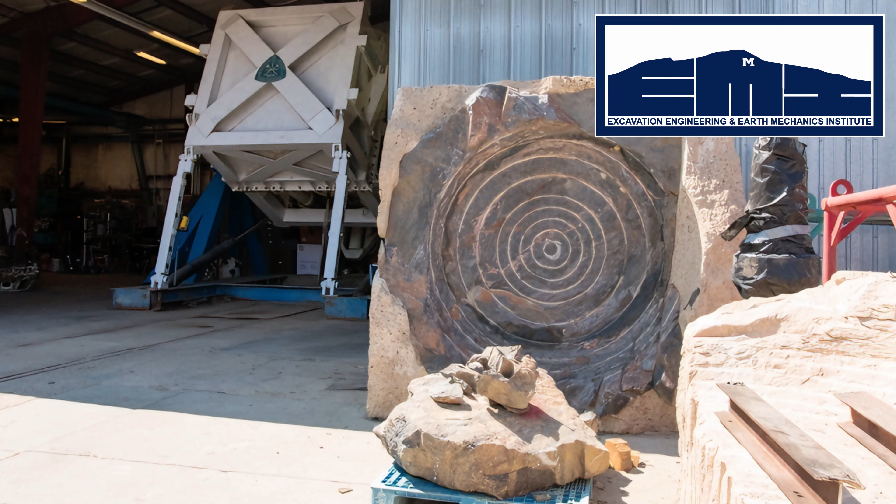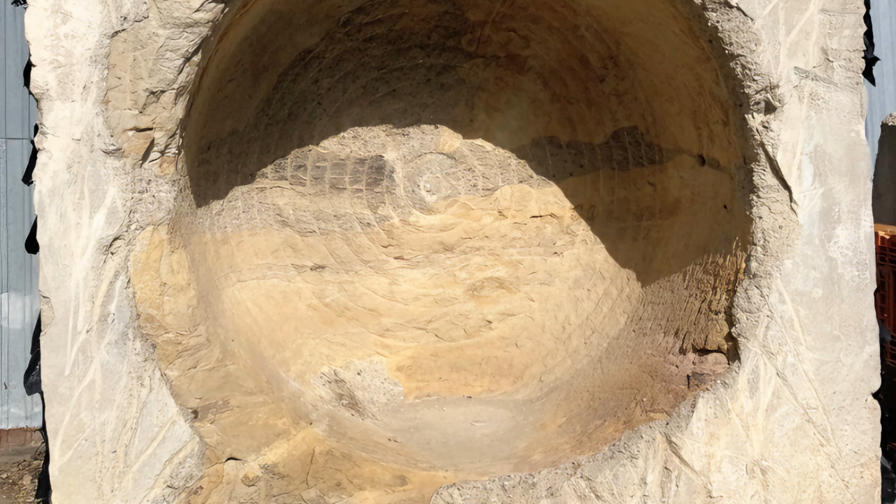called the Excavation Engineering and Earth Mechanics Institute. In brief, we call it EMI. In EMI, since the 1970s, we have had the equipment to perform full-scale testing of any type of cutters. It's already half a century. Wow, what a time span. EMI is probably the most famous rock drilling and excavation research facility. We have the capability to do full-scale testing of excavators and also drilling equipment.

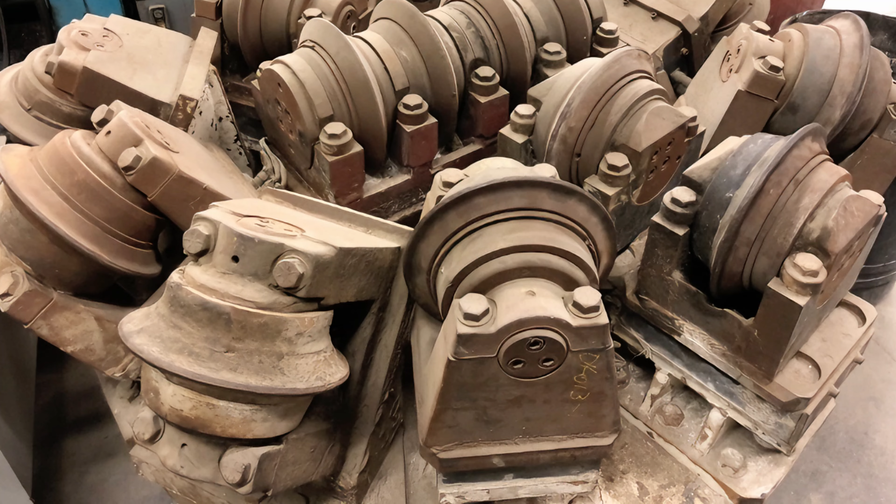And up until a few months ago, we were the only university facility that had a TBM on campus. We had it in our labs, but we had to dismantle it to make room for other research. So we had this capability to perform full-scale cutting tests. We could mount a full-scale disc, a 17-inch or 19-inch disc, on the machine, bring the rock in and cut it, and then record the forces.

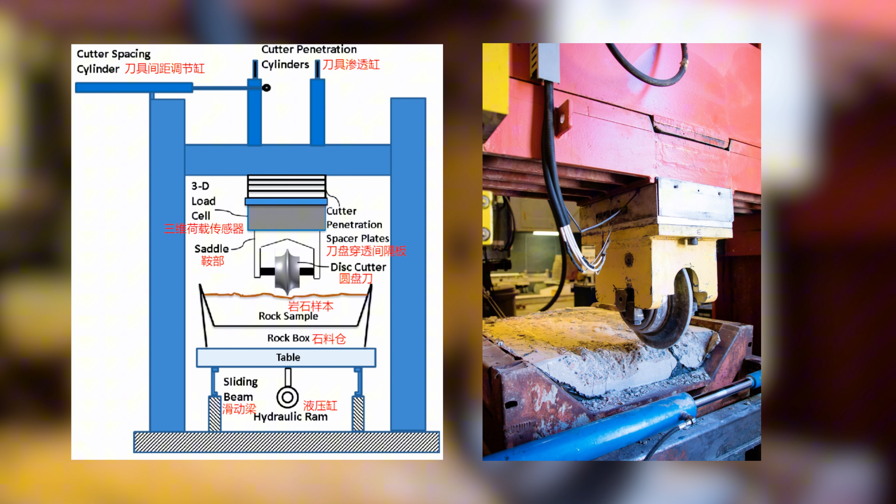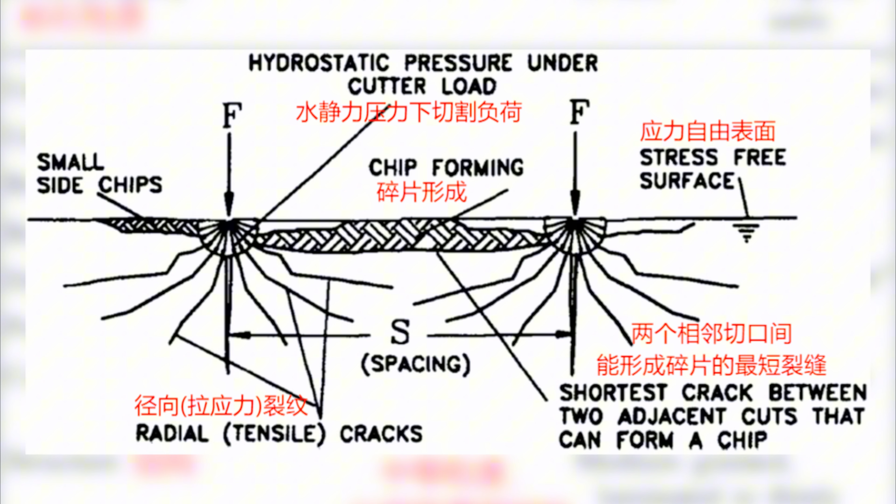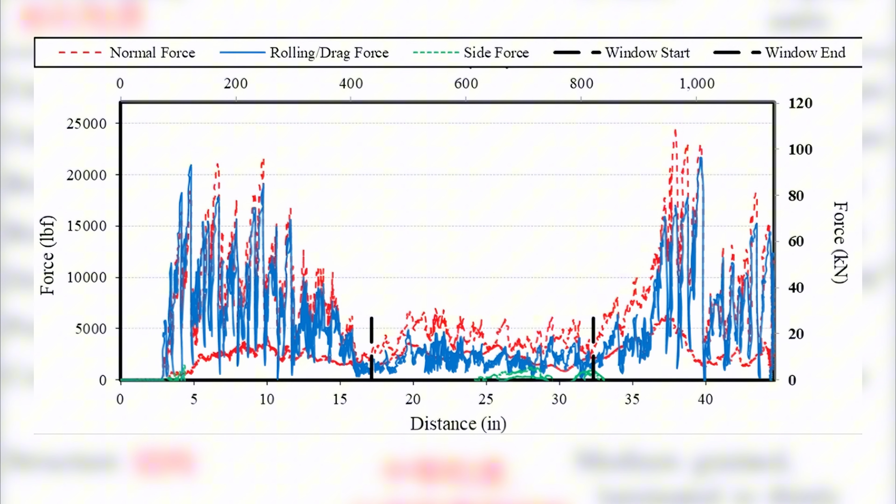By recording the cutting forces, we could correlate rock parameters and disc parameters, as well as the cutting geometry, like spacing of the cut and depth of cut. When we combine all of this, we can develop a predictive formula to estimate forces on the cutter for a given rock. I see. Once you have this formula, you can look at the cutterhead design and the performance of the machine.

I have developed spreadsheets and programs using these formulas to predict the behavior of the machine, change the design and see how it works, and also estimate how a machine would perform in a certain geology. So normally the TBM manufacturers would like to use your formulas for their machine design. So how about the contractors? From the contractors' point of view, do they still need to use your formula for their design or construction?

Correct. The machine manufacturers use the formula to estimate forces for design purposes. However, contractors or design engineers can use it to estimate the performance of the machine, how fast the machine will mine. I see. So one thing is to design the head, the other is to see how fast it mines in different geology. So contractors and consultants also use this type of formula.

As you know, in this world, at every location the rock condition is different. Before you give results from the formulas for a specific rock condition, do you need some supplementary tests to give a better result, or do you just advise people to use your existing formulas?

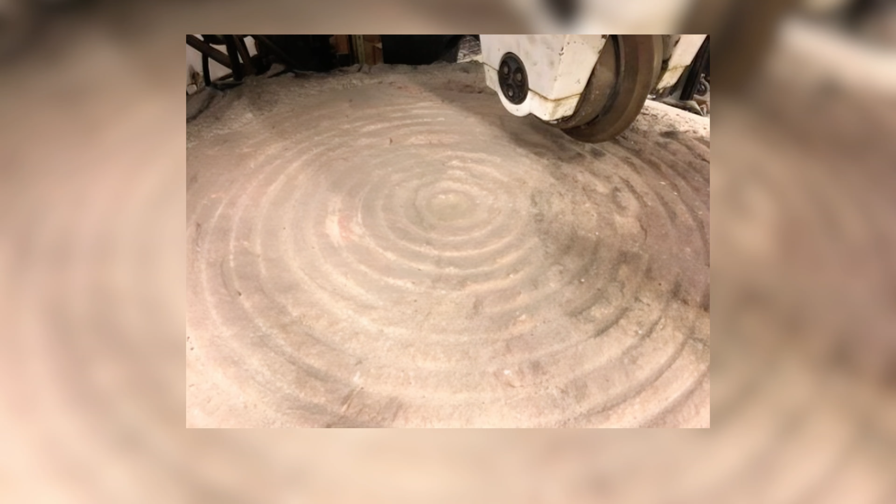I see. I believe you must get many feedbacks from the users, right? Based on their feedback, do you consider any improvement in future, and in which aspect? Absolutely. You know, no formula is eternal. You have to always consider that there is always room for improvement, especially in geomechanics and rock mechanics, because every rock, as you said, is different. The same rock under different stress conditions, under different joint conditions, may behave differently. So there is always a need for improvement.

For example, one improvement that we are thinking about is rock texture. The configuration of the grains could have an impact, so we can look at that. Another adjustment could be for rock brittleness. We have developed and are using a system called the punch test, which is not very commonly done, but still around. Interpretation of the punch test and how it impacts the forces could lead to improvements to the basic formula. And of course, when you do the performance prediction for the whole machine, you have to make adjustments for the joints, joint orientation, and other implications in the rock.

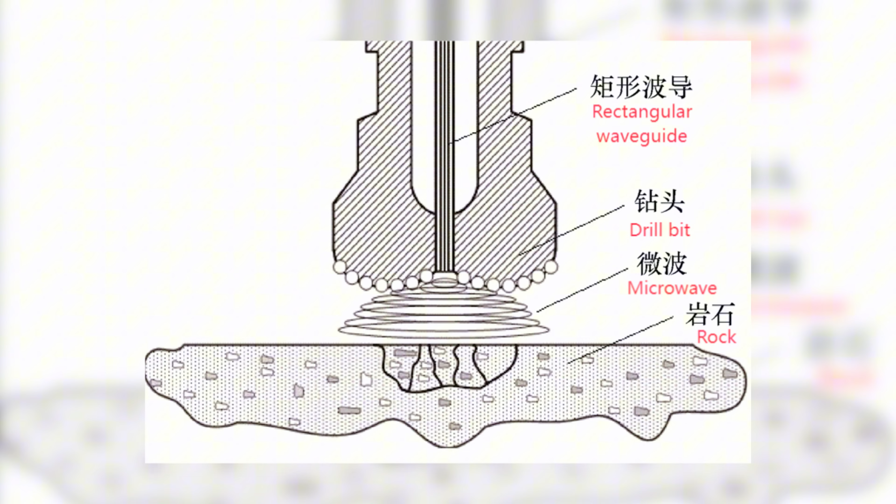Okay, in China, in some universities, professors started to study the use of microwaves or high-pressure water jets to cut rock. If they use these new technologies, it means they do not need to use your formulas. So do you have anything to develop new formulas for microwaves and high-pressure water jets?

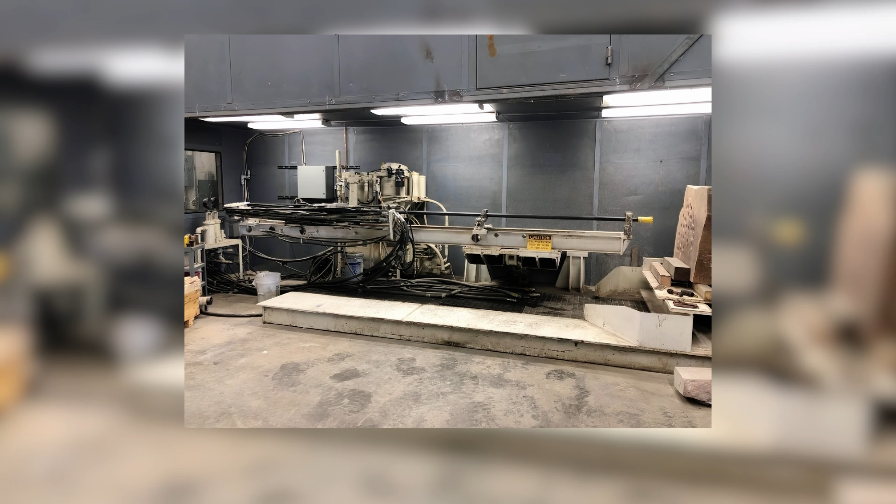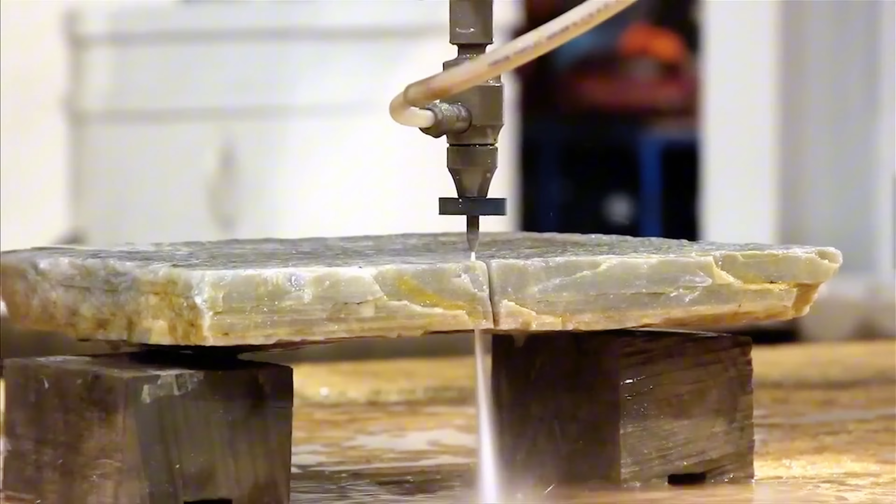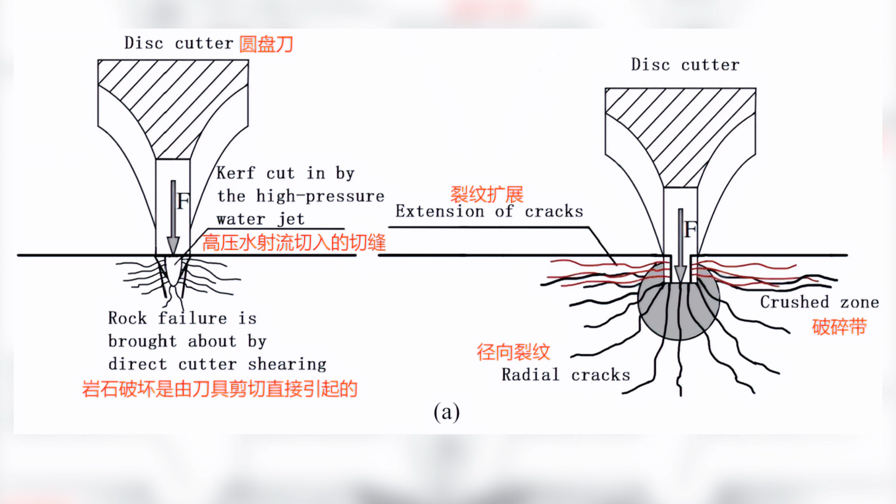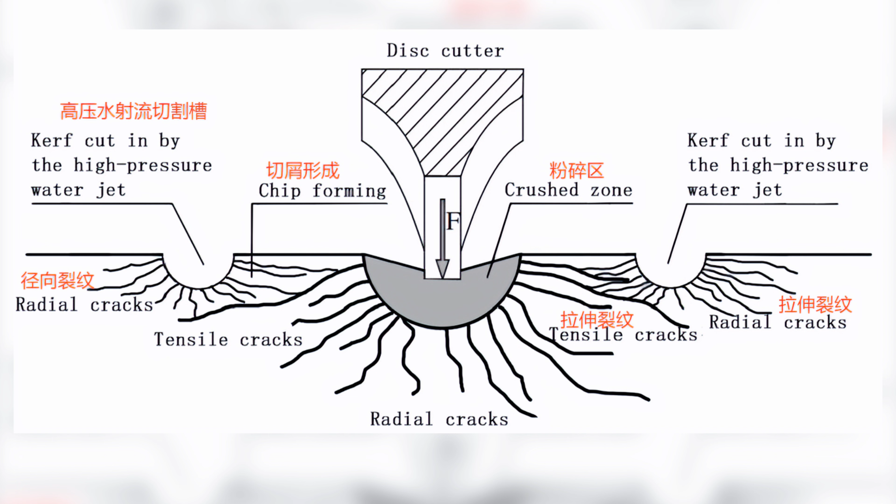Correct. Actually, in our lab, we do perform water jet testing. If you look at the history of water jet use in rock cutting, our lab started this 50 years ago. Really? So I'm fully aware of that. And we still have pumps that can go to 300 MPa water pressure and cut. So we have done a lot of work in that sphere. We know that water jet is not developing a fracture pattern that can change the behavior of rock for cutting. But you can still use water jet to assist the cutting, which means you can reduce the cutting forces if you apply water jet in the cut. That has already been tested and established.

However, for microwave, we are working on a couple of projects with big manufacturers. I cannot discuss the details, but yes, that has already been in consideration. We have already published a couple of papers about it. What happens is that you're developing microfractures under the rock surface that could change the dynamics of cutting and forces. And of course, that would also require adjustment of the formula. So as I said, nothing is eternal. Everything is open to improvement.